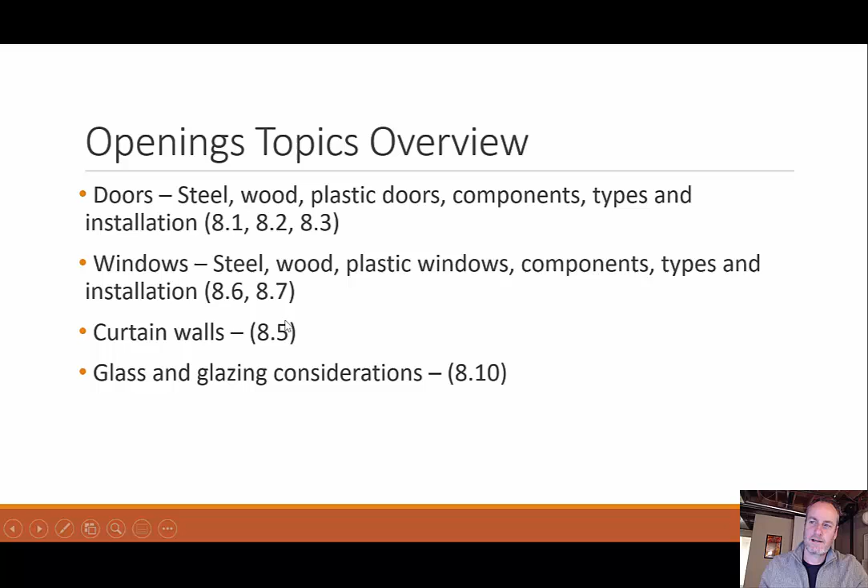As an overview, we're going to be covering this topic in a single session, unlike some of the other ones. We're going to be covering doors - steel, wood, plastic, some components, types and installation. We're going to be covering windows, also steel, wood, plastic, components, types and installation, curtain walls, and glass and glazing considerations. You can see the corresponding book chapters for each one of those.

So when we talk about general considerations for both windows and doors, some things we need to consider are sound and acoustic considerations. How much noise do you get through? How soundproof is your opening? Glazing, which is the same thing as glass considerations.

Heat reduction, more how insulative it can be to keep the heat either out or in. Visible light reduction, filtering of light, security, safety considerations. Can someone break in very easily? And different types of safety as far as how the glass breaks, things like that. We'll talk about that. And aesthetics, what does it actually look like?

We have the thermal considerations with the insulation, both surrounding the opening as well as the opening itself. Surrounding the opening, we talk about things like weather stripping, thermal breaks, things like that. Moisture considerations, we talked about this last time, flashing in a way to keep that moisture out. And you can use either flashing or caulk to seal out that moisture.

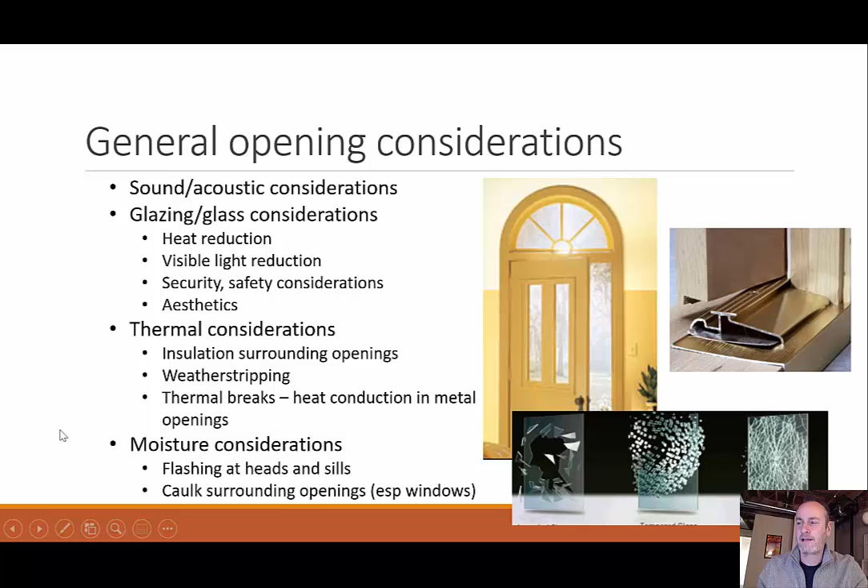So for example, on the safety consideration, what I see is a fracturing of glass. How's your glass going to fracture? Is it going to come out in sharp pieces that could cut you, or are they going to be more granular without sharp edges, or do you need it to stay intact and not fall out at all? So all those, based on its application, could be considerations.

So let's move on with doors, starting off with these steel doors. The level of these doors depends on the thickness, or at least that's how they are categorized. So level 1 would be standard, level 2 heavy duty, level 3 extra heavy duty, level 4 maximum duty. The difference between these is the gauge, or the thickness, of the metal. Once again, as the gauge decreases, the thickness increases. This is the lightest gauge at an 18, down to maybe a 16, and you can see how it just decreases from there.

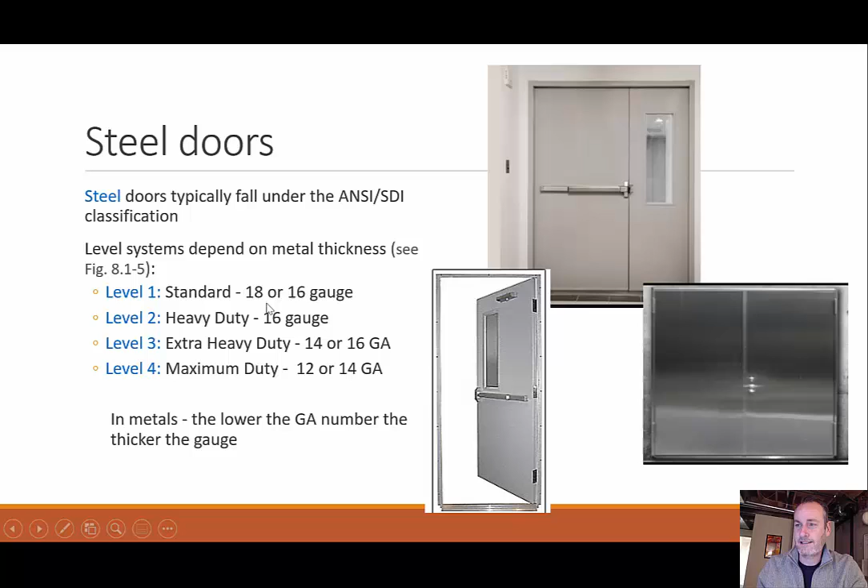So some terminology for these doors and windows. We have astragal, which is the molding attached right here to the edge of the door. Basically, if you've ever seen these French doors, or if you have two doors closing and you have a little piece on one side that'll close that gap so you don't actually see the seam, that's what that is. We have a mullion - it's that vertical member separating panels of glass. Here we see one right here on this door system separating these two panels. It could be glass as well with that center strip.

We have a muntin - same idea, but it could be a short vertical or horizontal piece. Not a picture in here, but we'll see one of those soon. And we have a stile, and the stile is the vertical members on the outside - so it's like this guy here and this one on the other side when I break it down.

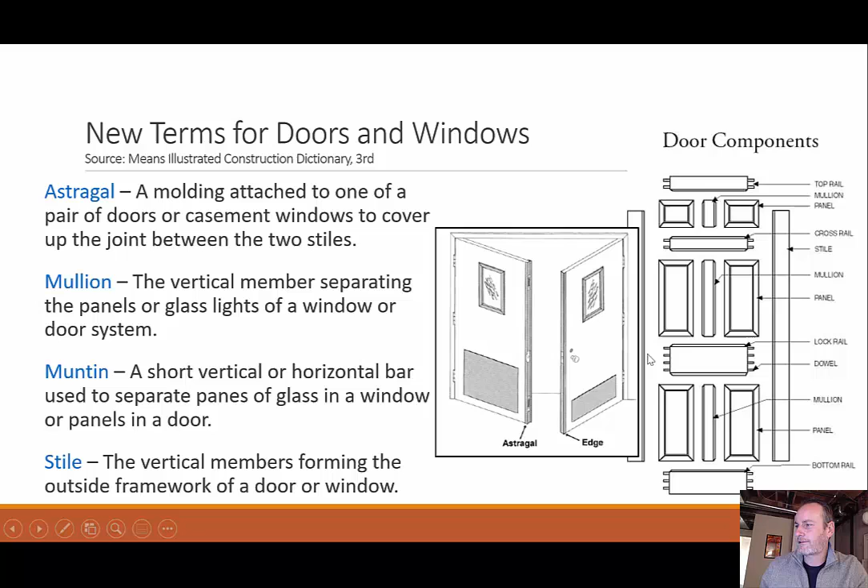Let's take a look at some door designs. Starting off with our steel doors, we could have a flush steel door, meaning there are no characteristics, no panels or windows or anything like that - this would be a wooden example, but same idea if it were in steel. Half glass, of course that means half the door is glass. Narrow light - you may have seen these narrow lights, more industrial, when you have a metal door and it's just a thin, maybe 4-6 inch wide window on one part of it, letting just a little bit of light through.

Bottom louver - of course these are your louvers, and you could have a wood door, oftentimes with the louvers on the bottom. We could have a Dutch door - Dutch door means they have these two pieces that operate independently, so I could just open the top or open the whole thing. We could have a full glass door where the whole thing is 100% glass, a full louver door, something like this guy, or a vision light door.

A stile and rail door—we talked about what stiles and rails are. Panel and sash, you hear terms like this. A sash is like a panel but it has glass, so you see a lot of these in French doors. Louvered, just like we talked about with metal doors, or a wood screen or screen door.

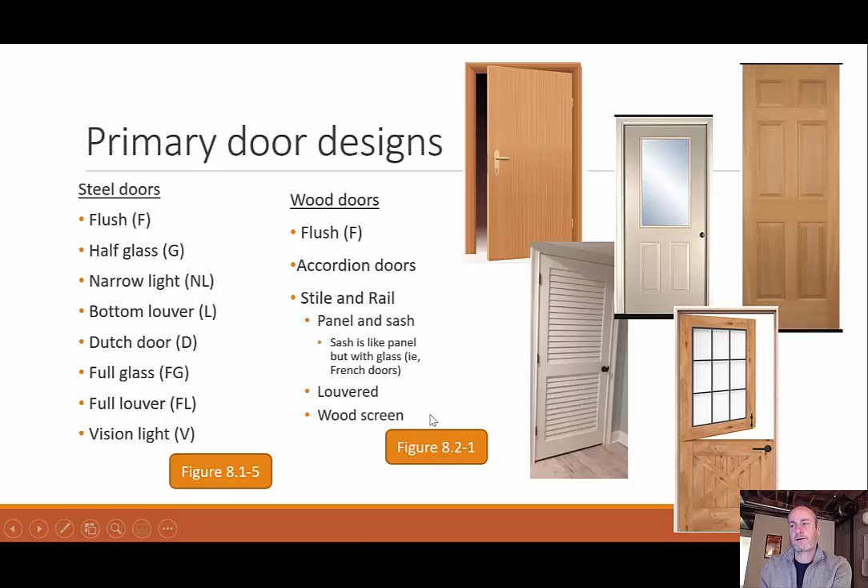Moving on with these styles, here you can see some of these: flush, flush with glass, flush with louver, a full louvered, stile and rail, a sash panel with glass. This glass up here is a combination screen storm door where I have screen and 100% glass. French doors, Dutch doors that open independently, rolling overhead service doors, rolling grill overhead folding doors.

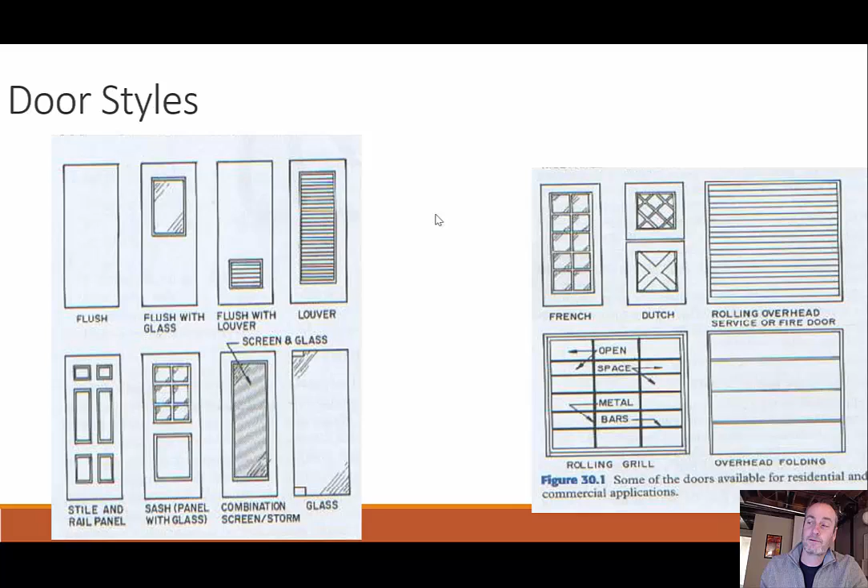Moving on with some more designs you might see. You can see a variety of different styles of doors, all depending more on aesthetics than anything else. Sometimes there's some functionality, if you want a certain amount of light in, on what part is glass and what part isn't.

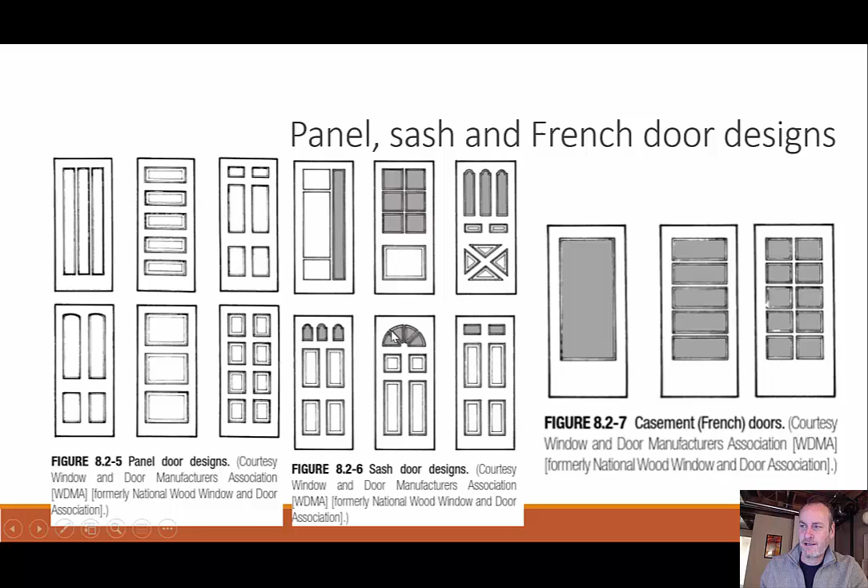So when we talk about doors, another way we differentiate is how they swing. We can call them either a left hand or right hand handed door, and basically that's the direction it's swinging. The idea is that the door belongs to the room that it opens into.

So if I were to look at these top drawings, say this was a bathroom on this inside, and this is like a hallway out here—this belongs to the bathroom. Now when it talks about which swing it is, or what handedness it is, you want to stand facing the bathroom and put your back to the door. Face the room that it's going into, put your back to the door, and whatever side the hinge is on—if I were standing here, it would be on my left-hand side, or this would be on my right-hand side.

You can have outside swinging doors as well. If we think of it opening into this room here, this is why it says outside—this is my room, this is my bathroom, and the door is swinging away from that room. It's still a left hand, but now it's called a left hand reverse, because I'm still facing the inside of the room. Sometimes you'll hear these called outswing as well—either reverse or outswing, same idea. Left hand, right hand, you're putting your back against it.

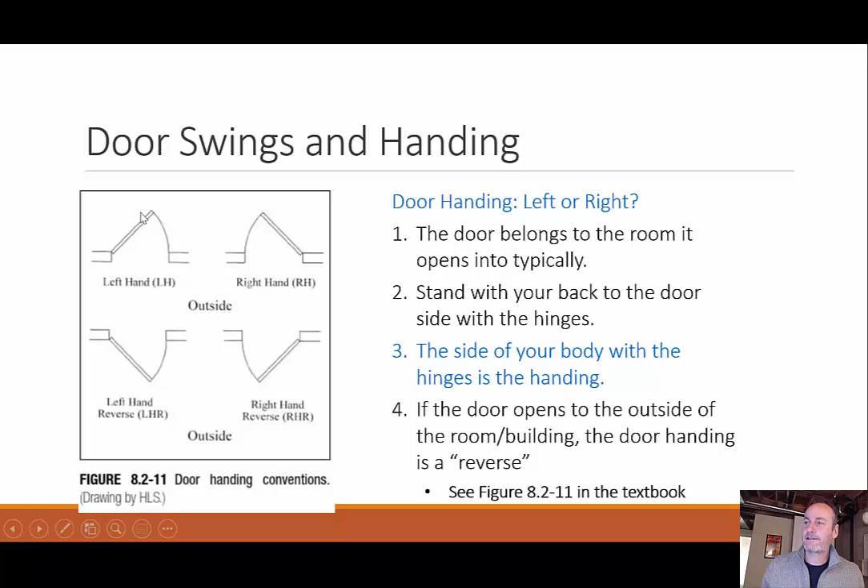The in-swing doors are way more common. This is what you really want to think about 99% of the time. We'll see more examples of these.

So when we talk about identifying doors, we're going to see a bunch of examples. What is it made out of—steel or wood, which are the most common, or plastic? Is it flat, or what do the panels look like? How many panels? Is it all the door, or half the door? Is there glass—does it cover all or part of the door? Are there any louvers? What direction is it—is the handing left-handed or right-handed? Is it reversed, meaning it's swinging to the outside of the room?

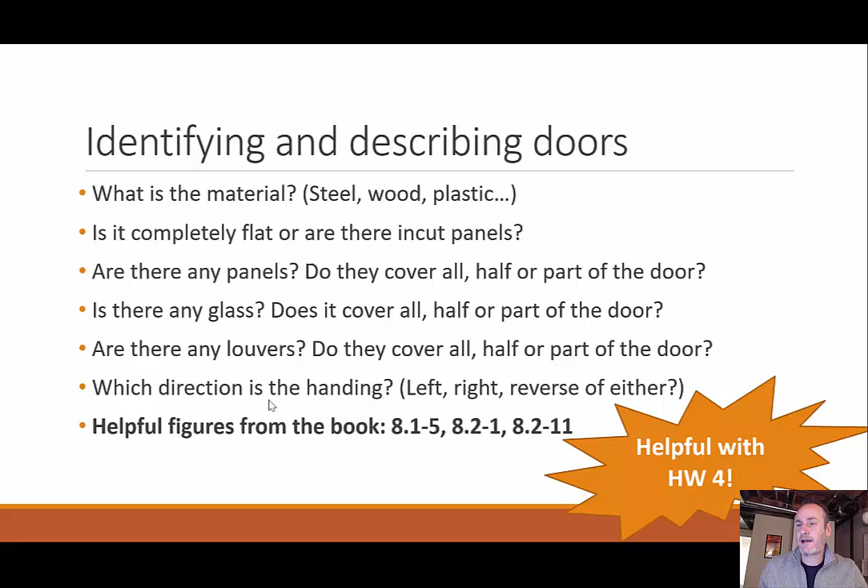What about special features of this system? We have this emergency bar here. The reason those are there is if it was a smoke-filled room because of a fire, you couldn't see, but you could reach around and find that bar easily, push it open. If you have your hands full, it's a benefit for that too.

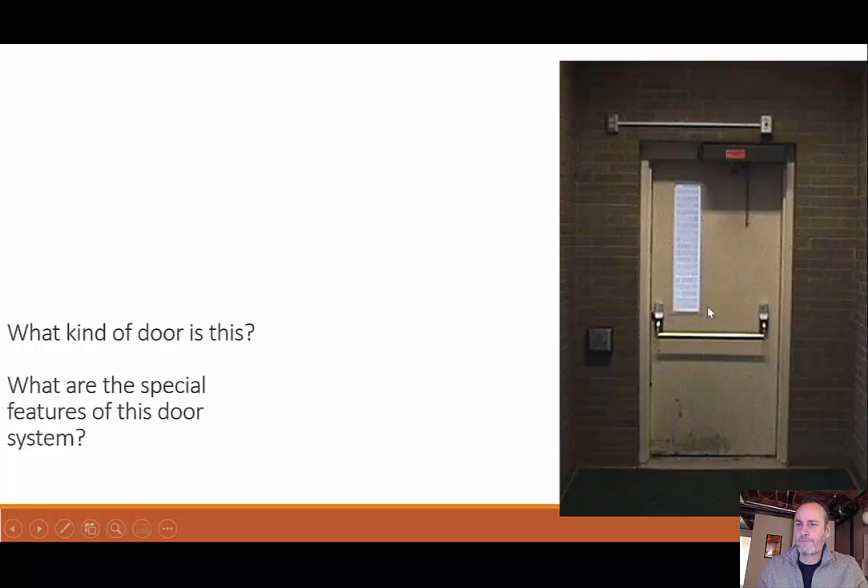So let's talk about installing doors. We have steel door installation and two different basic frame types around the door. They're either going to be fully welded, meaning the corners and intersections are all welded around this frame, or it's going to be knocked down, meaning there's a mechanical joint like screws or some kind of fasteners delivered to the job in pieces, and then it's all manufactured in the process. So it'll come to the job site as one solid frame or put together.

This looks like it would be a solid frame. This one looks like it was probably put together, knockdown style. Welded, knockdown. Special frame types, we could have a drywall slip-in, storefront, or lead lined, so there's some more terminology.

As far as installation, there are a couple of videos. I'm going to let you click on these on your own time, but how to install steel doors in a masonry setting or in these steel studs.

Installing all doors, they fundamentally have the same principle where you want everything to be level and plumb. There are really three different plumb and level checks you're looking at. You can't have it this way, and you can't have it coming out towards you, and you don't want it this way, and you don't want it crooked in any kind of way. So those are all the different things you're looking at. It's basically getting the whole thing squared up, level, and plumb.

So all the videos will deal with that, just a matter of different ways based on your application process you're going for. And of course, if you've ever hung a door, you know that if you have it out of square, it may not close all the way. If you had it out of plumb, your door might just open automatically, or it won't stay closed.

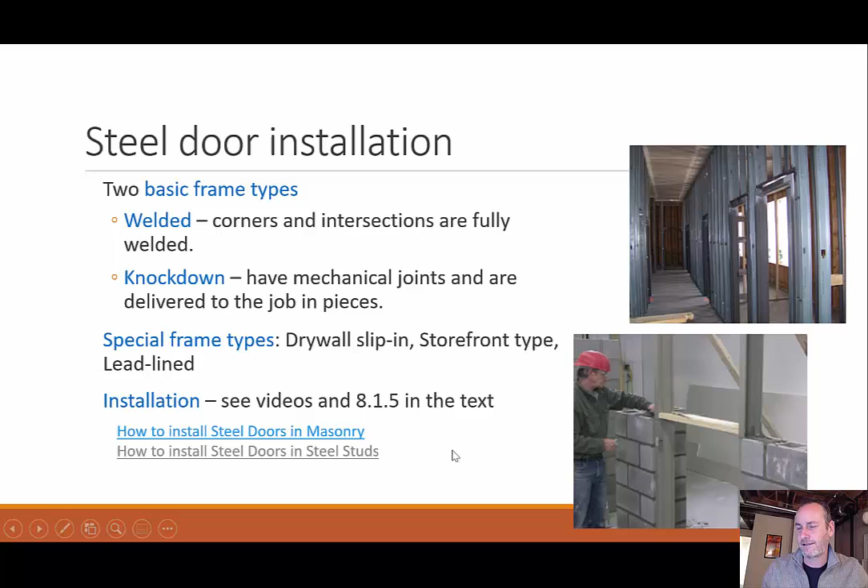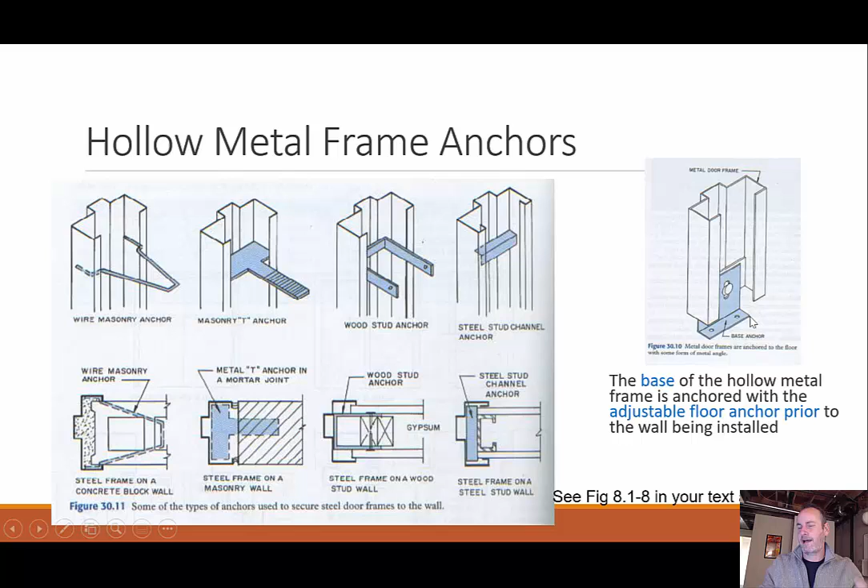So when we talk about these hollow metal frames, we have to anchor our door some way, and you can see some different anchors in here, from wire anchors or wood stud anchors or steel frame anchors. They're just different anchors. But for these hollow metal frames, the base of it usually has some adjustment to it to get our door at its height and close the gap up top or whatever we're looking at to do.

So you would see some of this on the video, but installing hollow metal door frame in an existing opening, you'll hear something called a punch and dimple. And what that means is that when you screw in the frame, it recesses into these dimples, and then you can hide it with some kind of putty or something like that. You can kind of see some diagrams going on here with that.

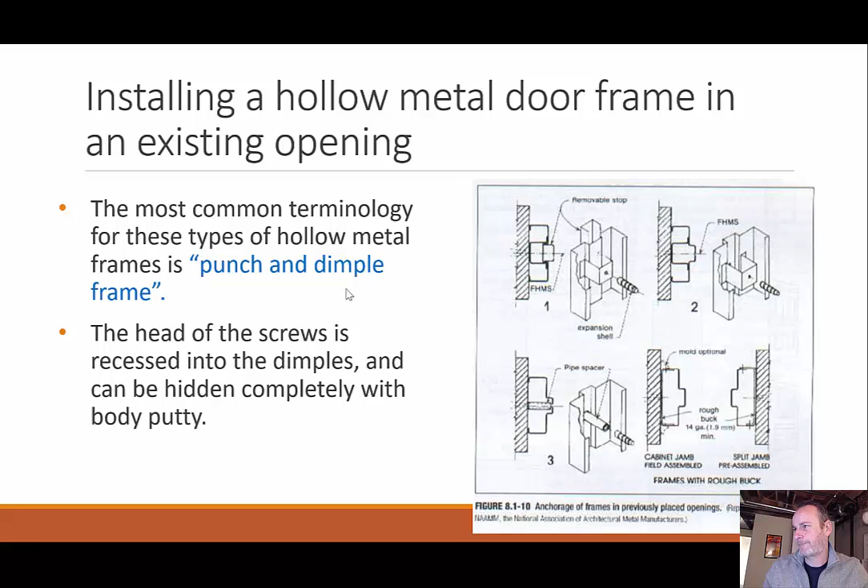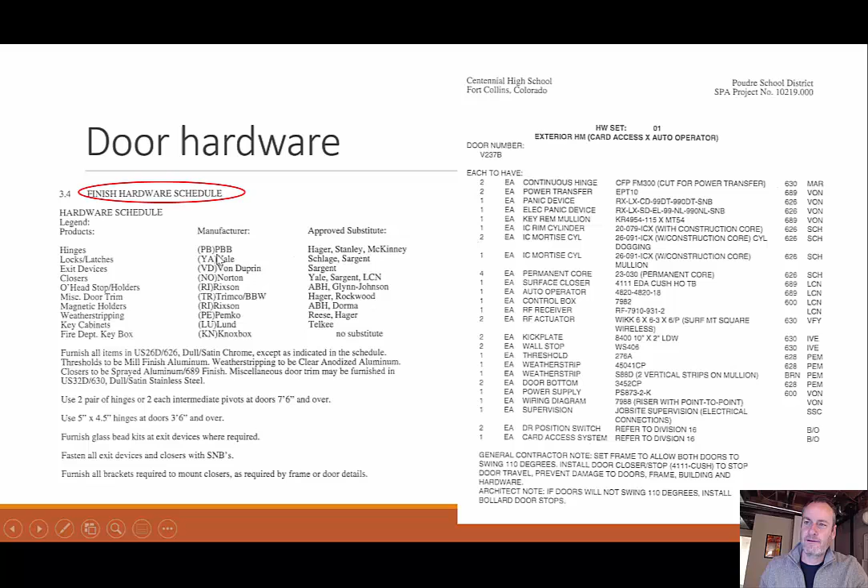So here you can see an example from what it would look like on the project manual, identifying different types of hardware that would be needed on your doors.

And from the project manual, here we see a drawing. We can see it talking about the different parts of the doors, from hinges to the mullions and characteristics of them and whatnot. On the drawing, you can identify a door such as this.

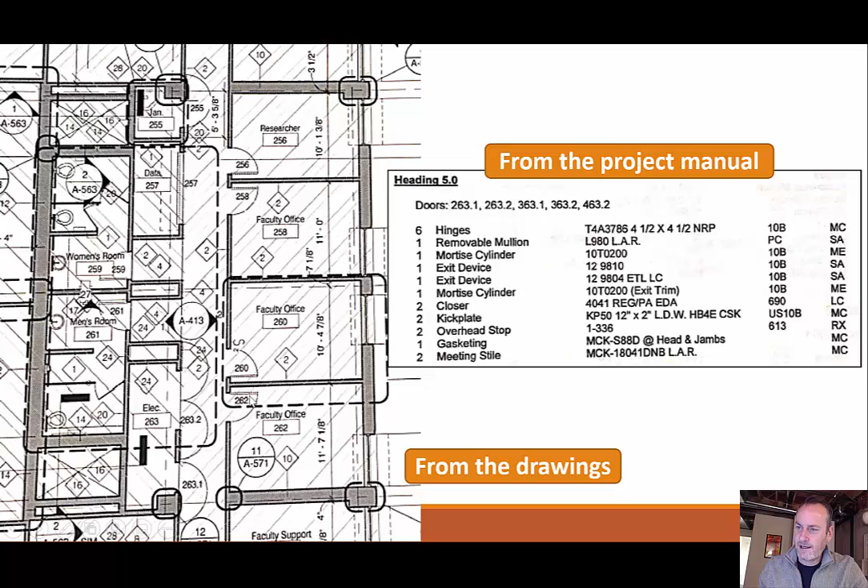You'll usually see here's the door, and you have a little bit of a swing. You can tell which direction, left hand, right hand, things like that. So like this door right here would be a left-hand swing, into this faculty office.

So let's switch gears a little bit, move on to windows. 8.6 and 8.7 from the book. We can have different types of windows, just like we had different types of doors. We can have a double hung, casement, horizontal sliding, a fixed window, or an awning.

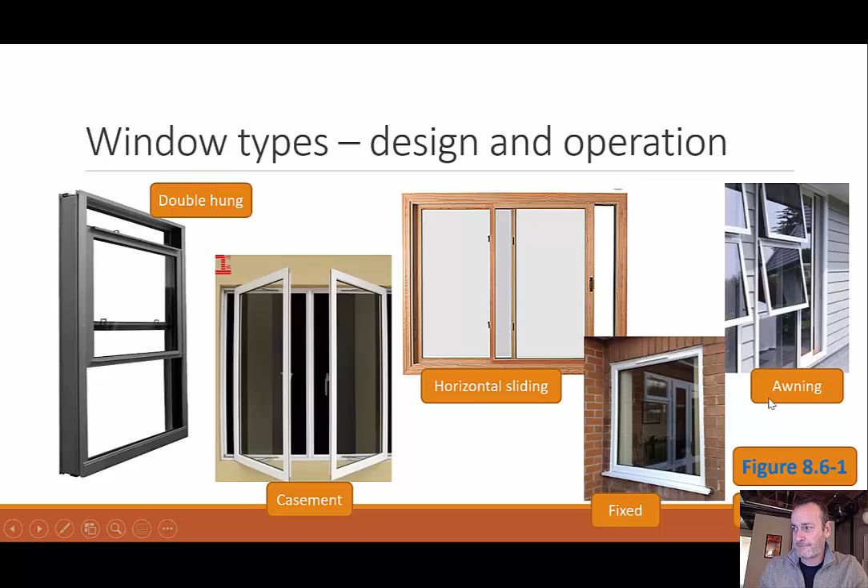We'll talk more about these individually on what makes them that. But fixed window means exactly as it sounds. It's just fixed, a solid sheet of glass framed into a wall, doesn't open.

Double hung looks like this, where I have the two windows. Double hung means that the bottom can go up and down, but also the top can go up or down. So double hung means that both of those should be operable.

Single hung will look almost exactly the same, but usually the top one is fixed in place and only the bottom one goes up or down. So single hung versus double hung, they look the same, but the way they operate is a little bit different. Oftentimes there'll be a weight or counterweight that helps keep everything in place.

A casement window means it's basically encased. The whole window in the frame around the glass is opening up. Usually there's a crank arm, and it opens up as one system. These ones are usually better for sealing out the weather because you do have that solid connection.

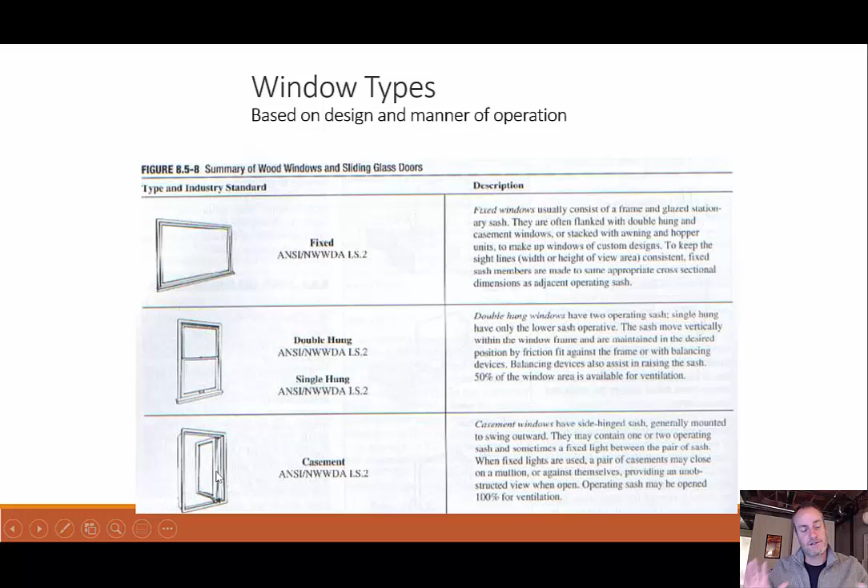Of course, not as good as fixed, but horizontal sliding - panes of glass, and then one side, possibly both, will slide one in front of the other.

We have an awning where basically the window is pushing straight out. There's usually some kind of hinge or something that is keeping it in place to keep gravity from sucking it back in. Hopper looks just like an awning, only it's upside down.

So we have it coming out towards us. Basement window looks just like an awning as well. I think the only difference between basement and awning is the direction that it swings, because with the basement window, it's more like egress. You need to get out of the basement, you need to get out the window, so you have it open towards you so there's nothing obstructing it on the outside. That's my understanding anyways. Identifying, describing windows.

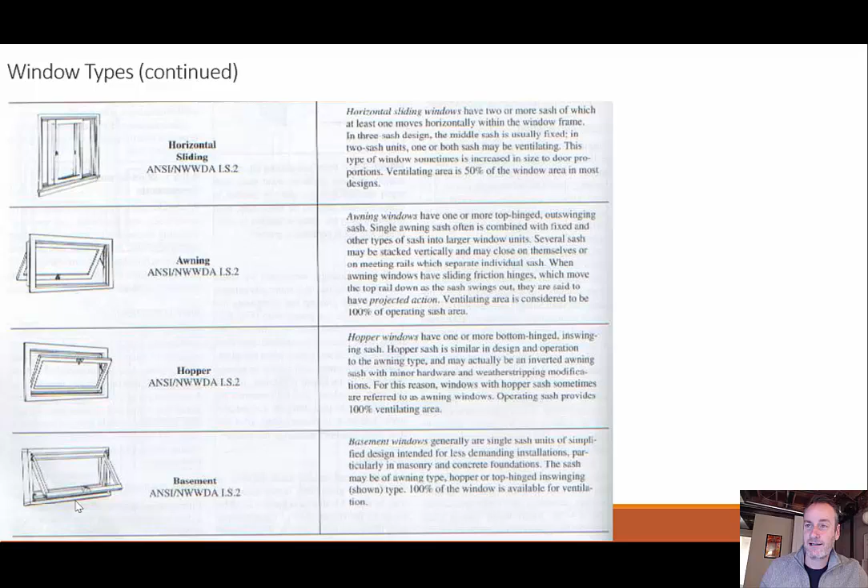So what is the material? Just like with doors, is it steel? Is it wood? Is it plastic? How many panes of glass, or how many glass panels are there? Similar to doors, are there separate panels?

Does the window open, and in what direction? Vertical, horizontal, sliding, hinged, pivot, multiple panels. We talked about that already. If there are multiple windows together, like an awning window, are they all controlled with the same mechanism? Are there any mechanisms in place that minimize the effort to raise the sash?

So this is what I was saying. You might have weights in a wall, and then when you lift it up, the weights are making it easier or minimizing the effort to raise the window. What does the glass look like? Is it treated, tempered, glazed? So you can see some more figures from the book, 8.6-1 and 8.7-1.

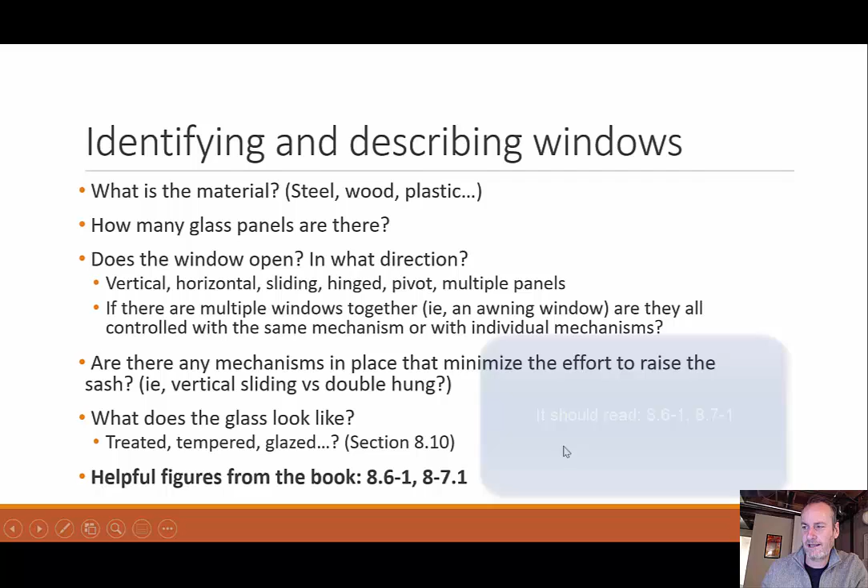Thermal break. A big issue with windows is insulation. How much of the heat or cold are you going to get through a window? If you have a poorly insulated window, if you've ever stood next to it, you can just feel, if it's on a cold day, you can feel that cold coming right through the window.

And so we do these thermal breaks to separate these two sides. We can see that there's insulation for this. There's two panes of glass. Inside there's a gas or air or something like that, which is a great insulator to keep that part out. The other issue, though, is the metal itself.

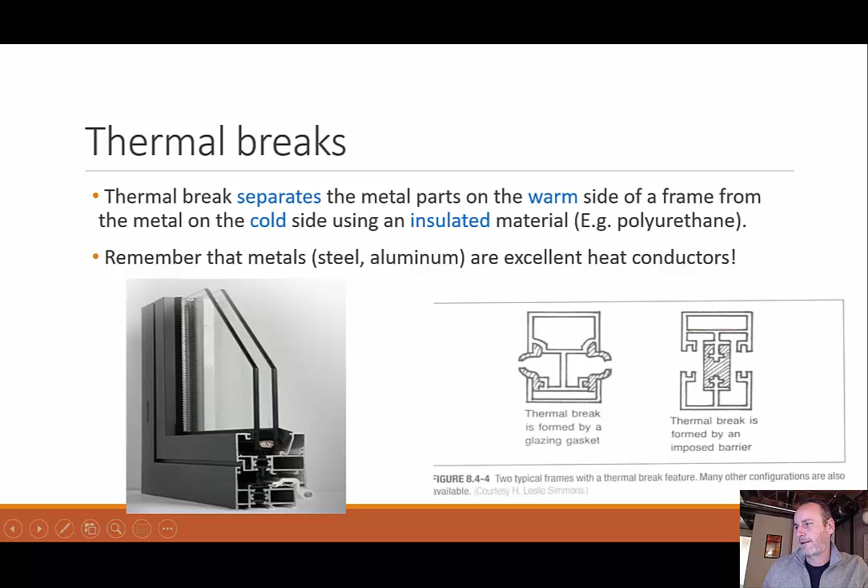We know metals are a great conductor of heat. So if I were to have one side cold, that cold would just transmit right to the inside through this metal frame. To keep that from happening, we have a little barrier in here of some sort, a thermal break or thermal barrier, to keep that heat from going through.

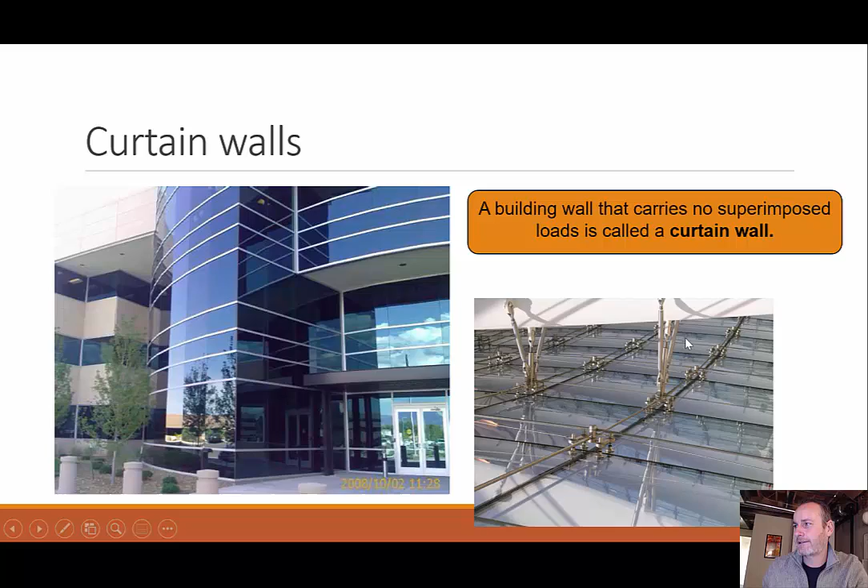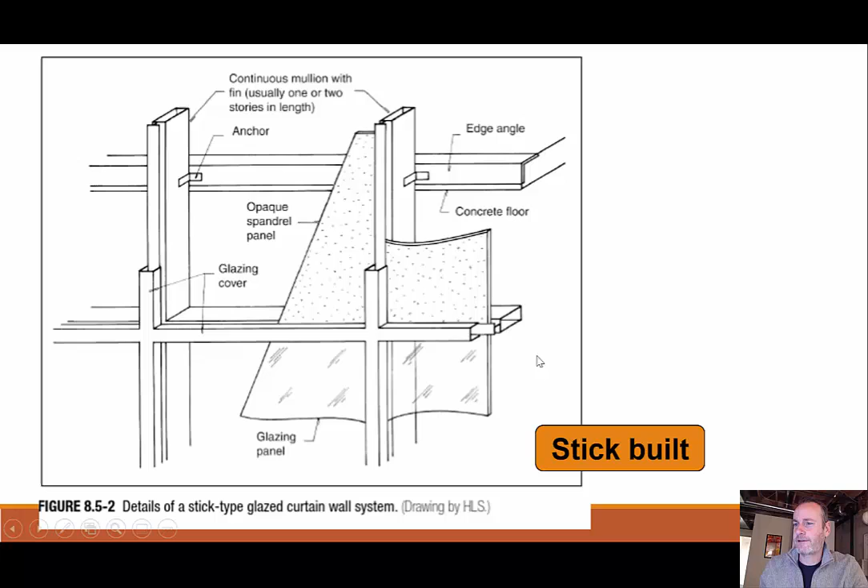Curtain walls, this will be covered more with our Chuck Mowry guest lecture, but briefly, what is a curtain wall? This is on the exterior of the building. I see all this glass, right? It's not structural at all, it's not holding any load. It's basically hanging from the building like a curtain. I can see all these mechanical connections holding that glass in place. This is a stick-built curtain wall. Stick-built meaning I have these horizontal and vertical members supporting all of this glazing. The sticks are these individual pieces, just like we talked about stick framing.

Versus unitized, meaning the whole thing comes in as one massive unit and you just hang it, maybe just at the top or something like that, right?

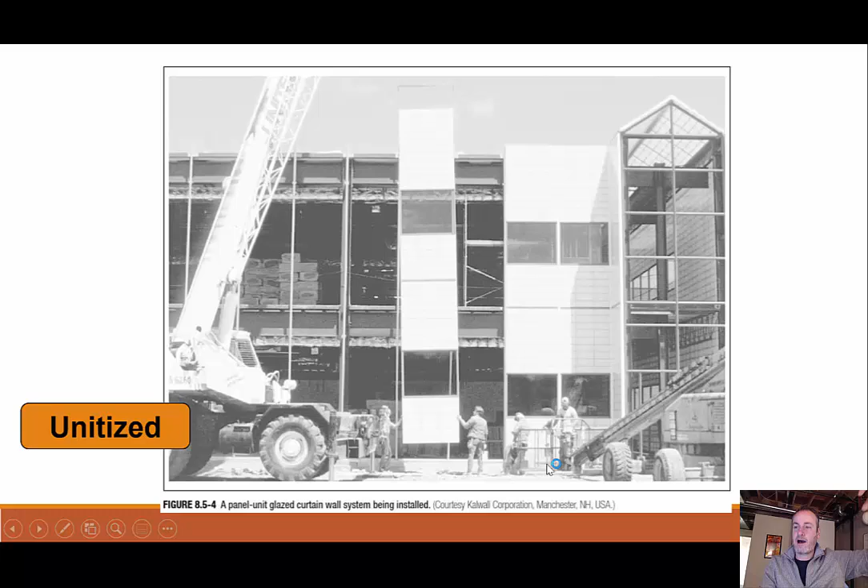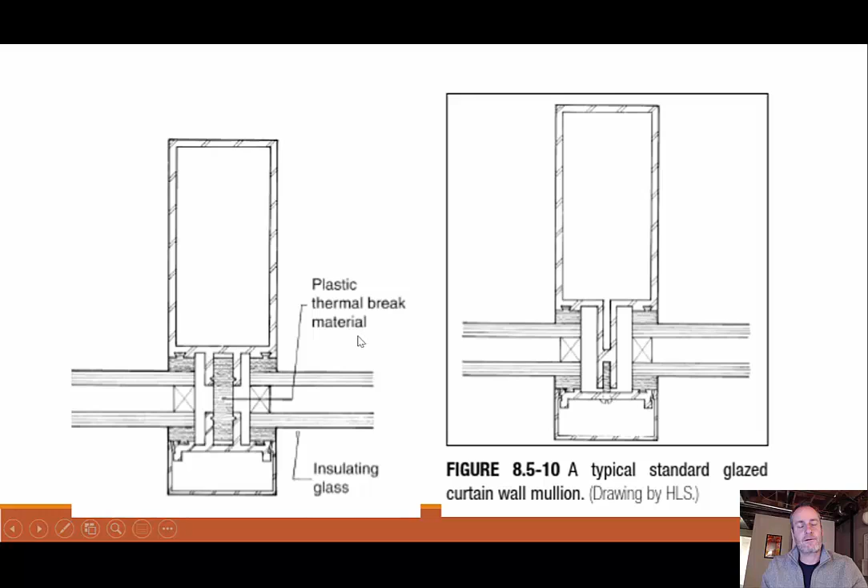So within our curtain walls, we once again have to have these thermal breaks to keep the heat from transmitting through the metal, same breaks we saw before. We talked about U values before, the reciprocal of our R value, R being resistance to heat flow, U being the heat flowing through. That's a measurement of transfer through glass, just like we've seen with our other insulating materials.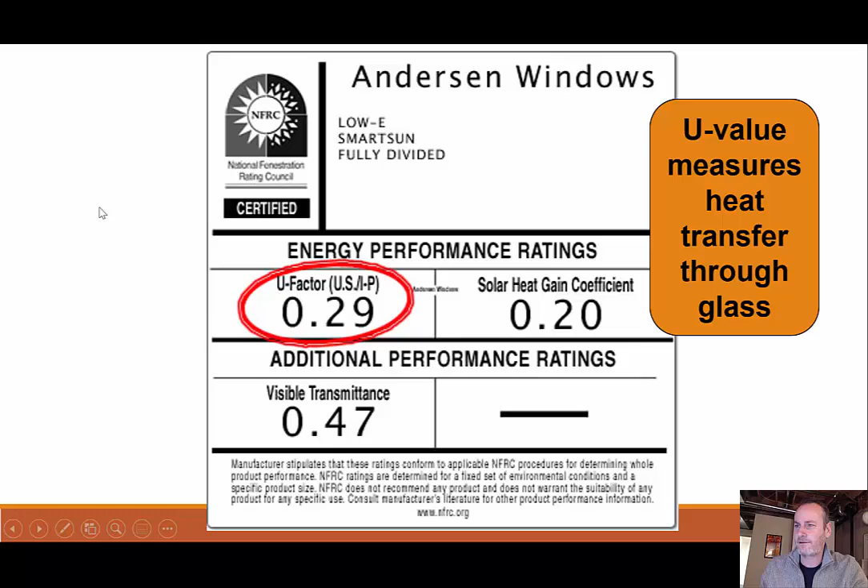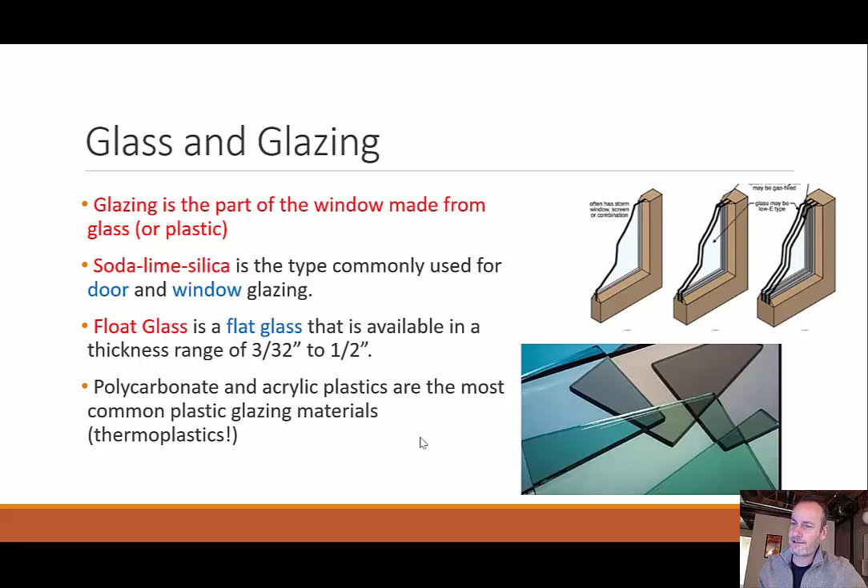Moving on with this idea of glass and glazing, and in particular the surface finishing on these doors and windows. Glazing really just means the part that's made from glass. It could be plastic, but 9 times out of 10 it's just glass. Typically made with soda lime silica, and float glass is a flat glass, some kind of thickness between 3/32 and 1/2 inch. Polycarbonate and acrylic plastics are the most common plastic glazing materials, thermoplastics if you have plastic windows instead.

Manufacturing the glass and glazing, you can have a process called annealing, also done with metals, doing the exact same thing. You're raising the temperature, heating up your glass, freeing any internal stresses going on within it. Then you let it lower to room temperature slowly. That's key, letting it cool slowly to this uniform state, which reduces some of those internal stresses, making it slightly stronger.

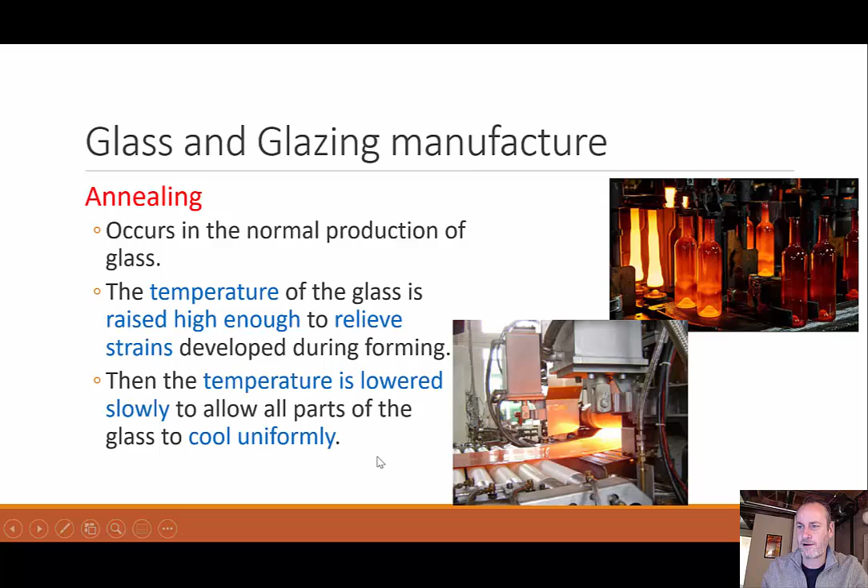You can also temper it. Tempering increases the strength of the glass, you might have heard of tempered glass before. Almost the same idea, but you raise the temperature until it starts getting soft, into what's called the critical zone, beyond the point where it's almost changing phases. Then you cool it quickly, blowing jets of cold air or cooling it some other way quickly, which freezes everything in place. As it heats up, things are moving around on the molecular level, then you freeze it in place.

You could have either a fully tempered glass, which works like a safety glass. This is what automobiles have to have nowadays. If you've ever seen a car window that's broken, you see a bunch of little almost cube-looking pieces, right? It doesn't break into shards, because those sharp pieces would cause damage. Instead it breaks into these round pieces without sharp edges, from tempering your glass, or having a fully tempered glass.

It's 3 to 5 times as strong as annealed glass for loading, thermal stresses, and impact loads. You can also have heat strengthened glass, only partially heat tempered. This is not considered a safety glass because it breaks into larger fragments, but it is stronger, 2 times as strong as annealed glass for uniform loading, so not as strong as fully tempered. It's basically an intermediary step between annealed and fully tempered.

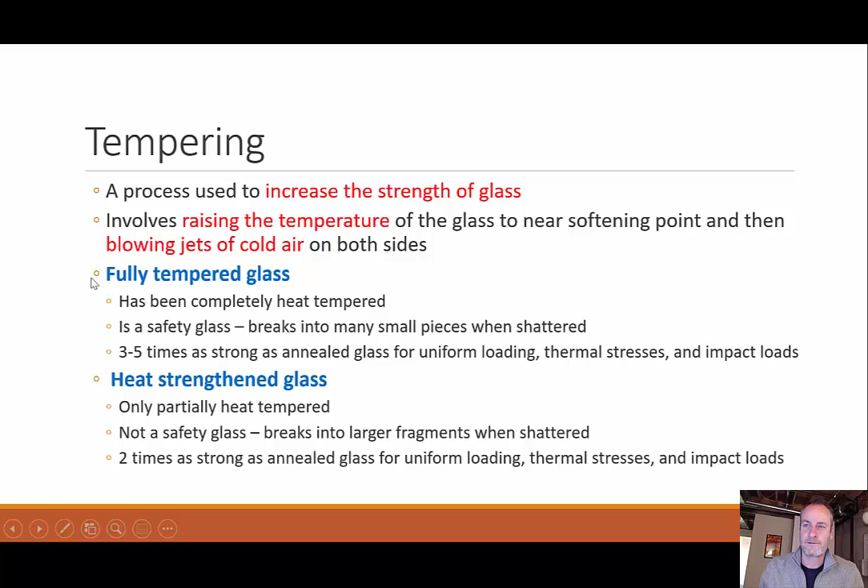Less expensive process overall though. So a big part of our glazing that we need to consider is heat reduction and light absorption. Often we can add a coating onto the side of our glass, and what that does is reflect out a large portion of this heat and light to keep it from getting into our building envelope. As it says, it's a metallic oxide used during this manufacturing process.

You can also tint glass, which is basically like a film that you put on the outside. It can result in light absorption that reduces visible light but does not reduce UV light. So in essence, it makes the room darker but not cooler.

You can have light reducing glass, which is just the tinting you put on the outside. You could have light reducing and heat absorbing glass. So it depends on what you're looking for. Do you want your glass to reflect the heat or absorb the heat? Do you want it to reflect the light or absorb the light? Those are the two variables you're playing with in these processes.

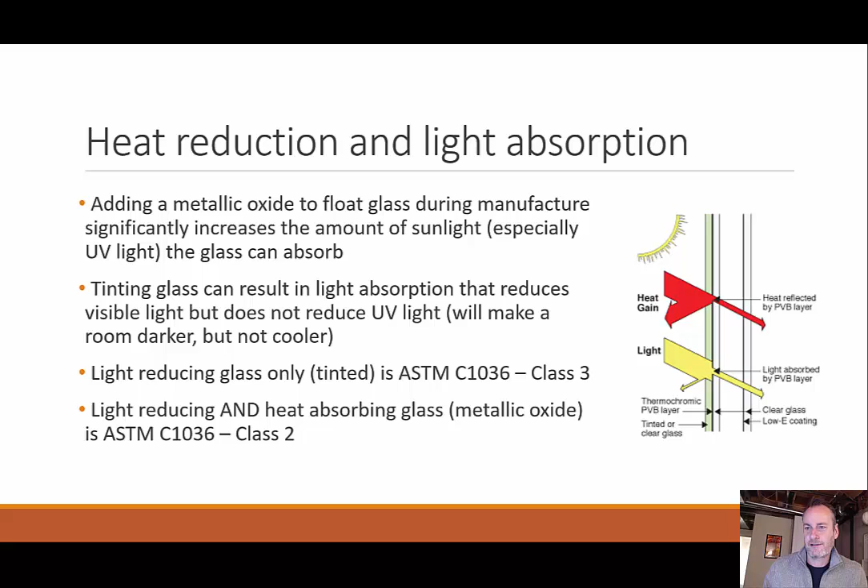You can also laminate your glass, basically putting multiple panes of glass together, creating a composite. Composite just means made of multiple layers of glass. You could have two sheets of glass with a single plastic interlayer. The reason you do this type of thing is to encase the glass.

With tempered glass, I said it would break into these small shards. If you had laminated glass, I can encase it so that it doesn't actually leave, it just shatters and stays right there. If you saw the new Tesla truck, Elon Musk throws the thing and breaks the windows, and you end up with this spider webbing. That was laminated glass. Of course, it was supposed to be much stronger than what he showed, but regardless.

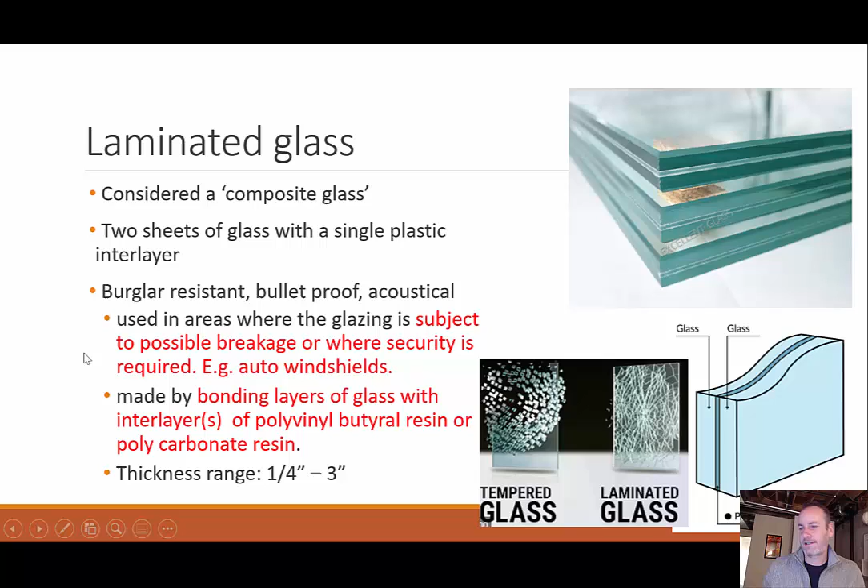So burglar resistant, bulletproof, acoustical, things like that - this is the reason you would use this laminated glass. It's made from bonding layers of glass with interlayers of polyvinyl butyral resin or polycarbonate resin. You can have multiple thicknesses, from down to a quarter inch up to like 3 inches.

When we talk about this glass, you can have different types. You can have insulated glass, and I mentioned this earlier, where if I have multiple panes with a gas in between, it has this insulating process because air is a natural insulator that keeps the heat from moving from one end to the other.

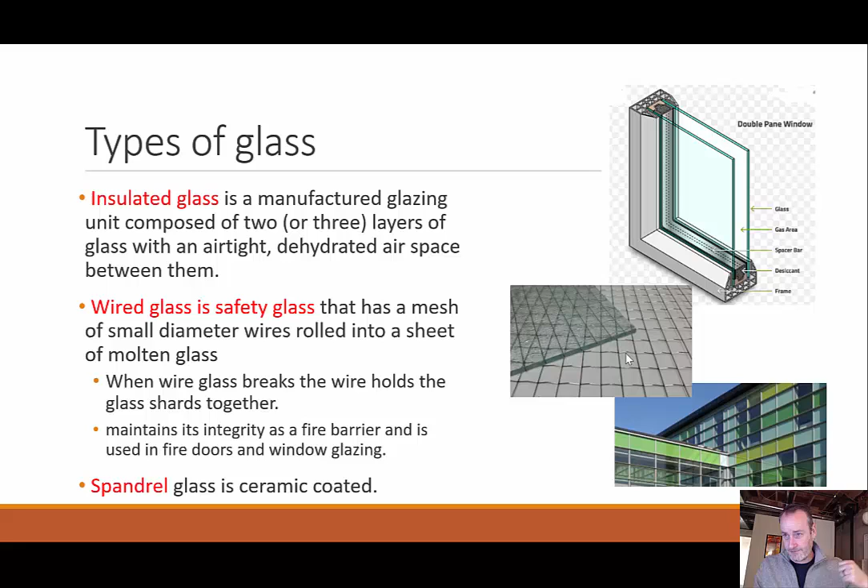You can also have wired glass, which is like a safety glass, usually more in commercial applications, where you can see there's wire inside the glass. I always think of a school building when I see this, or old buildings from the 60s and 70s. That wire mesh keeps the glass in place if you were to break the glass.

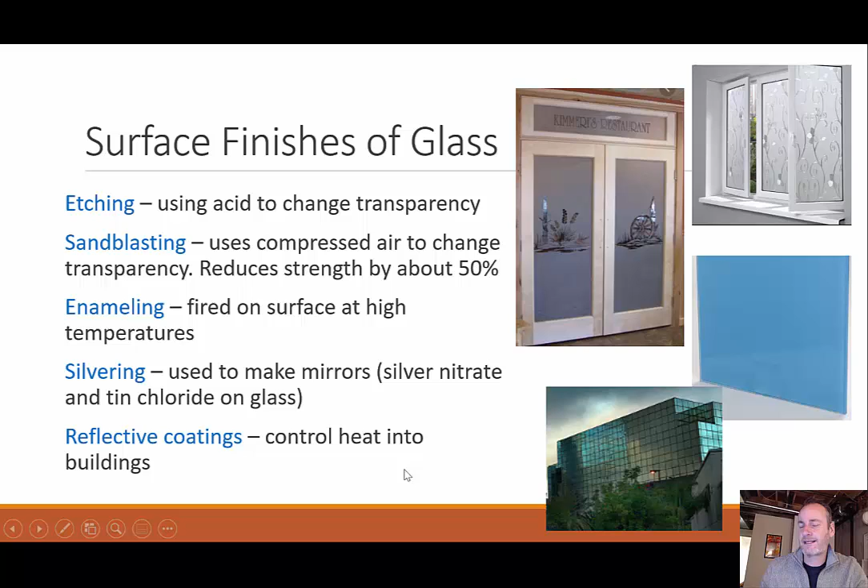You can enamel your glass, which is like firing at a high temperature, or silvering, to make it look like mirrors. Basically, all a mirror is, is glass with a coating on the back side - a silver coating on the back side. Reflective coating controls the heat into buildings, which we talked a little bit about earlier.

So here we see putting it all together for the insulative properties and everything else. We have an aluminum frame, and then we have our glazing. Then we have a gas in between our glazing, which is our glass - so we have glass, glass, glass. This is a triple pane with two air pockets in here. The air is composed of argon, which is a good insulating gas.

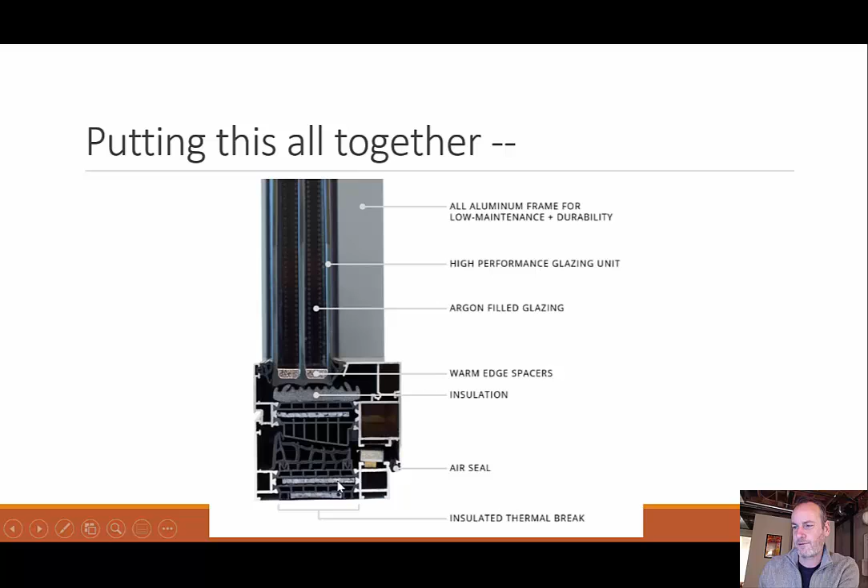Warm edge spacers - once again, this is insulating between the inner and the outer. More insulation down here, air seal down here, and then we talked about this thermal break to keep the metal from transmitting heat from one side to the other. We have this piece in here.

Once again, you can look at the project manual and get more specifics, such as manufacturers that are approved for a project, different types of finishes, or if it needs to be wired or not, and what type of specifications that wire needs to meet.